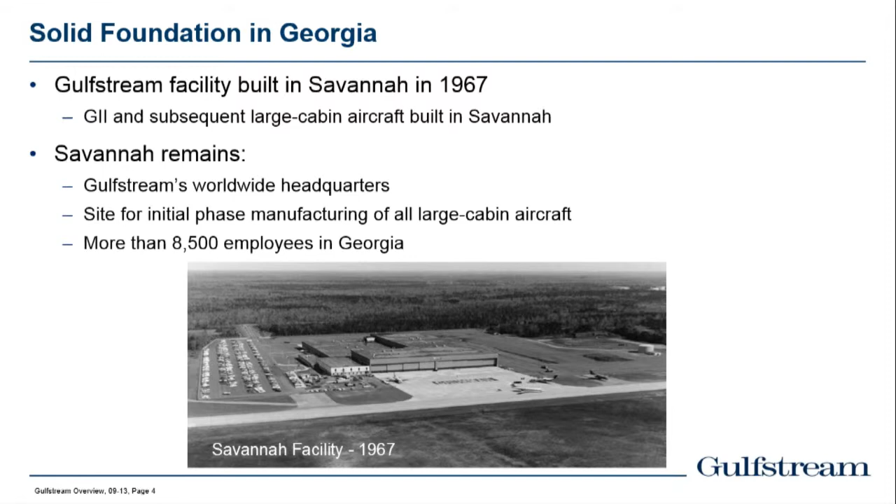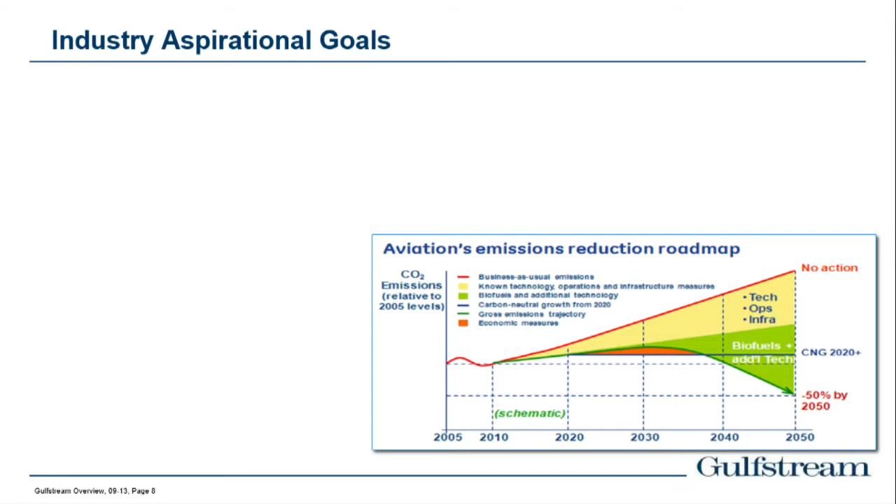The reason is we looked at a couple of statistics. General aviation is about 2% of all the aviation emissions, CO2 emissions, and about 0.04% of all carbon emissions. So it's easy to get caught up in the argument that we're not really much of a polluter, so why even worry about it? Well, a couple things I'd mention. First of all, we still were polluting the environment and are today. And secondly, more and more airplanes are being delivered to the international marketplace, so the installed fleet of general aviation aircraft is increasing dramatically. So we're going to have much more of an impact on the environment.

So what did we do? We set a broad set of emission goals. These goals outline specific targets for the reduction of CO2 emissions primarily. That's to achieve carbon-neutral growth by 2020, achieve fuel efficiencies of 1.5% to 2% annually through 2020, and then by 2050 to be able to reduce CO2 emissions by 50%, with a baseline of 2005.

So we've made a commitment based on 4 pillars, and you can see them also in the graph. One is improved technology, for example avionics, the ability to approach airports without having to circle them. Many of you that fly on commercial airliners know that sometimes you're slowed down, you end up circling an airport. That's because of the efficiency of the air traffic control system, and avionics and the air traffic control system are very important that we address.

Infrastructure and operations is also critical. That's satellite-based navigation, and what you'll hear about is FAA modernization, because that's a very, very fundamental need for us with the FAA to be able to modernize their technology.

And then the use of alternative fuels. Although very promising, I'm going to talk about that in a minute, it's going to require some sustaining funding and a commitment by the industry to make sure that we can do this. Because as you'll note in the graphic, it's about 40% of the goal to be able to reach the 50% reduction goal by 2050. And then market-based measures, and these are usually measures such as working with the EU on trading scheme emission controls and so forth.

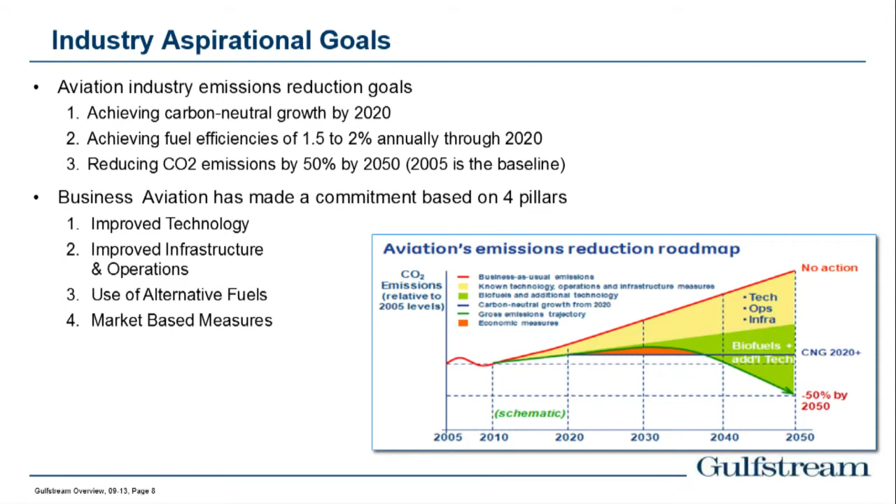So, specific to Gulfstream, there are a number of sustainability efforts that I just wanted to mention. We have a long history of product improvement in noise, emissions, fuel burn, and it's all about having a focus on the environment. So sustainability is being introduced to all aspects of our business, including aircraft design and manufacturing. Our enterprise-wide sustainability goals deal with things like facility improvements, aircraft design and manufacturing, supply chain, the use of renewable fuels, and then an internal focus with our teams in trying to do things every day that help reduce our impact to the environment.

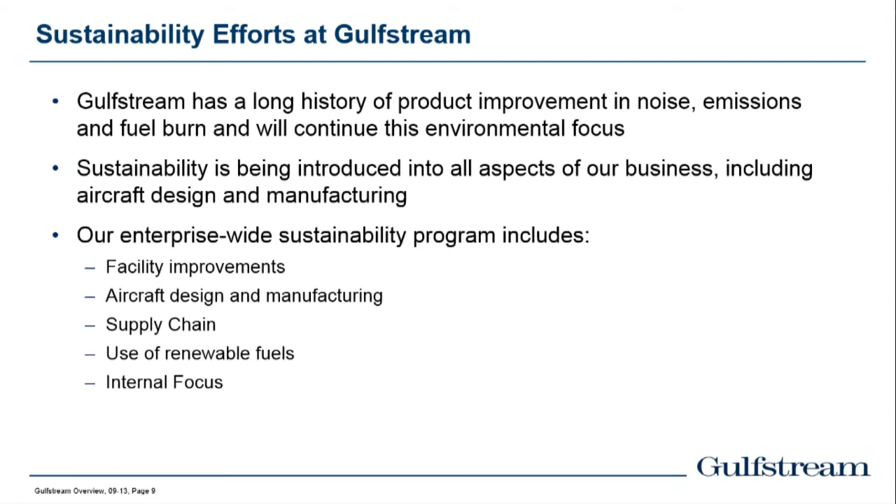Let me start with noise. The federal aviation regulations, what they call FARs, have come up with a standard that's in Part 36, and aircraft with certain type certificates received after 2006 and beyond must meet what are referred to as Stage 4 standards. Stage 3 was set back in 2005 for existing in-production aircraft, and for our purposes, the Stage 4 limit is designated in the horizontal line.

That's the red line you see in this graphic, and our goal is to be well below that, and we are. So by the way, if you look at that red line and you look at the aircraft that are currently in production, now the 4 and the 5 are now replaced by the 450 and the 550, and the 650, of course, is brand new. And you see we're doing pretty good in terms of noise reduction.

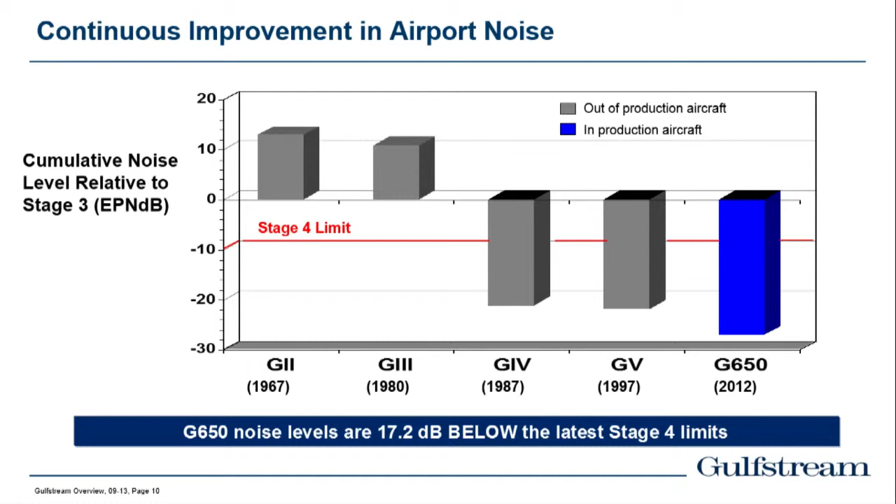Now the other area is emissions, and this gets pretty complicated, but also very challenging for us. The International Civil Aviation Organization, ICAO, was founded back in 1944 with the objective of promoting aviation safety, security, and efficiency, among other things. ICAO's current environmental activities are handled through the Committee on Aviation Environmental Protection, or CAEP, established in 1983.

This group meets annually and sets emissions standards every 3 years. Our industry is now moving to meet the CAEP 6 standards specific to engines put on our airframes. Older aircraft like the G2 are under different standards, but the G450, 550, and 650 have demonstrated a progressive reduction in nitrous oxide levels over the years, as you can see here. Those designations underneath the bars are the engine types on our airplanes.

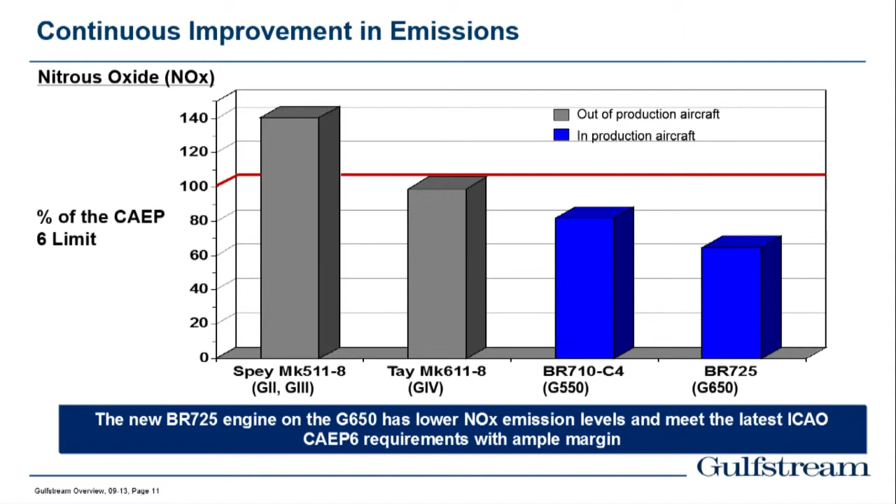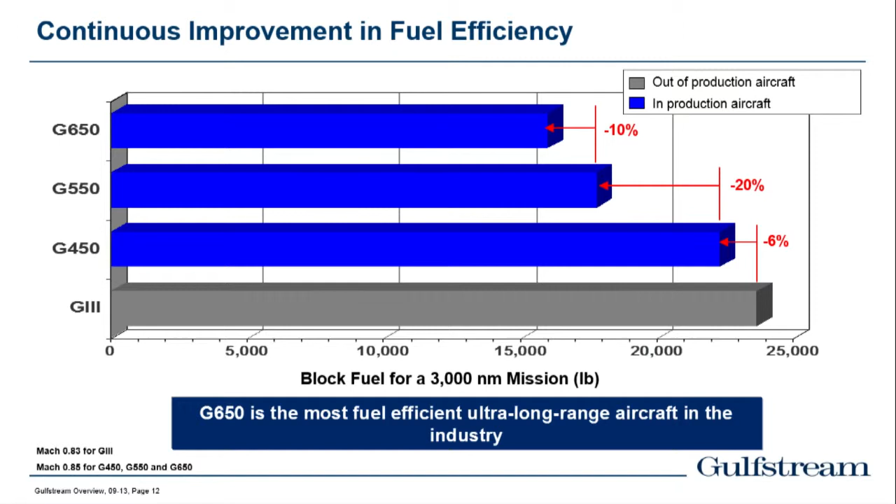Improving fuel efficiency is part of our environmental and technology goal, which helps us meet our CO2 emissions goal of a 50% reduction by 2050. We measure fuel efficiency by block fuel, which is 3,000 nautical mile mission - that's the standard we use. As you can see, there have been steady improvements from one Gulfstream model to the next: the 650 made a 10% improvement over the 550, and the 550 a 20% improvement over the 450. We've done a lot in this area, but we're not done yet.

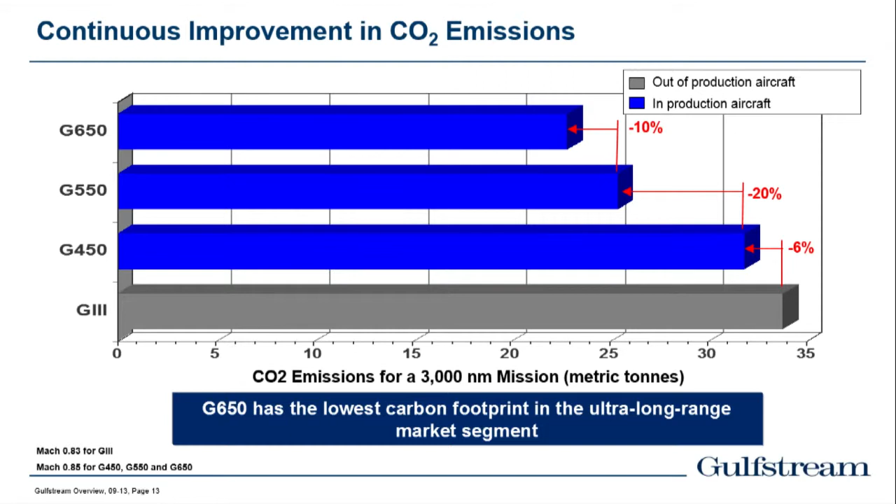Now a little bit about renewable fuels and why we're so interested in this. What are renewable fuels in the first place? Many of you know this, but they involve the recovery of any biological source used for fuels. In other words, once that source is harvested, how do we make sure it's recovered quickly? Some of the fuels we're looking at have to meet that sustainability goal. Quite frankly, these represent a step change in reducing emissions - less sulfur, aromatics, carcinogens, and fine particles especially - and can produce less CO2 over their life cycle.

So renewable fuels do two things that support our goals: they support sustainability, and they support the industry-wide goal of CO2 emissions reductions over time. We also believe renewable fuels will be recognized by the European Union Emissions Trading Scheme. What we want to do is make sure we use these and understand the dynamics and challenges associated with making sure they're sustainable and there's enough to do what we need to do in the industry.

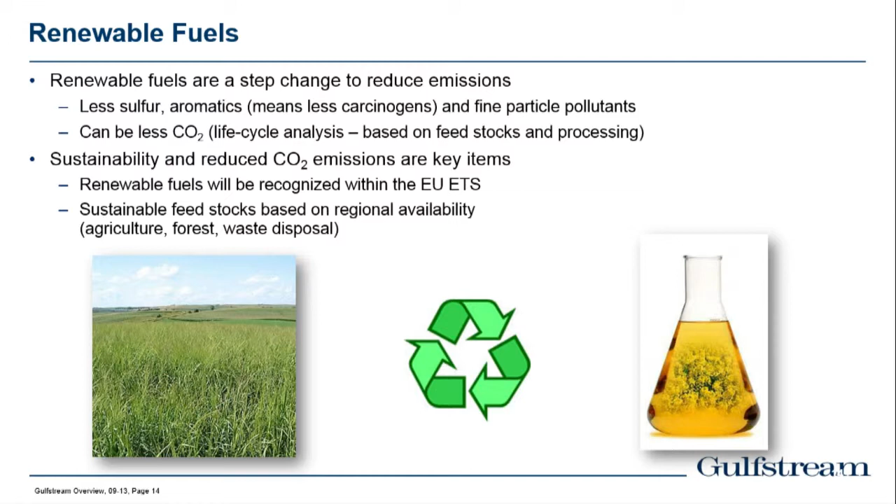As far as renewable fuels for aviation in general, the military has had great interest in this technology and has been using it. We have a good start in this area, but there's a lot to do. We believe establishing ourselves as leaders among business aircraft manufacturers, or OEMs, is very important. For example, the Gulfstream 450 was the first aircraft to make a transatlantic flight on biofuel.

In doing so, it saved 5.5 tons of CO2 using biofuel. We are the first OEM to fly an entire fleet of airplanes to a major air show on biofuel, using a certified fuel based 50-50 blend of camelina biofuel and Jet A.

A little bit about camelina, in case you're not familiar with it - it's a weed that grows and produces a seed. When you crush that seed, it generates an oil, and that's the oil we use in either biodiesel or biofuel. It has such capability and promise that we think it could eventually reduce the CO2 footprint in general aviation by as much as 75% compared to the traditional Jet A fuels we use today.

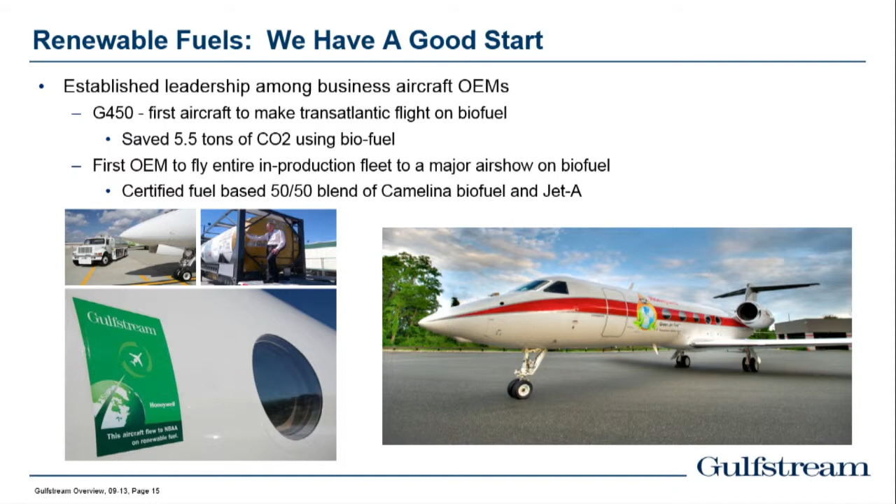Now, I mentioned internal improvements, and some of them have to do with buildings that we build. If you get around the airport, you're going to see buildings cropping up all over the place. Those are LEED certified, which stands for Leadership in Energy and Environmental Design, based on standards set by the U.S. Green Building Council. It deals primarily with the design and operation of the building, from tooling and equipment to how much energy they use.

We also have a recycling program. This is something we started years ago, but we really didn't get it going substantially until we got our employees involved. So 600 tons recycled through single stream programs—if you look at that graphic, you see those blue bins, meaning you can put all your recyclables into one bin instead of going to individual recycling containers. We've diverted 1.2 million pounds of recyclables from the waste stream.

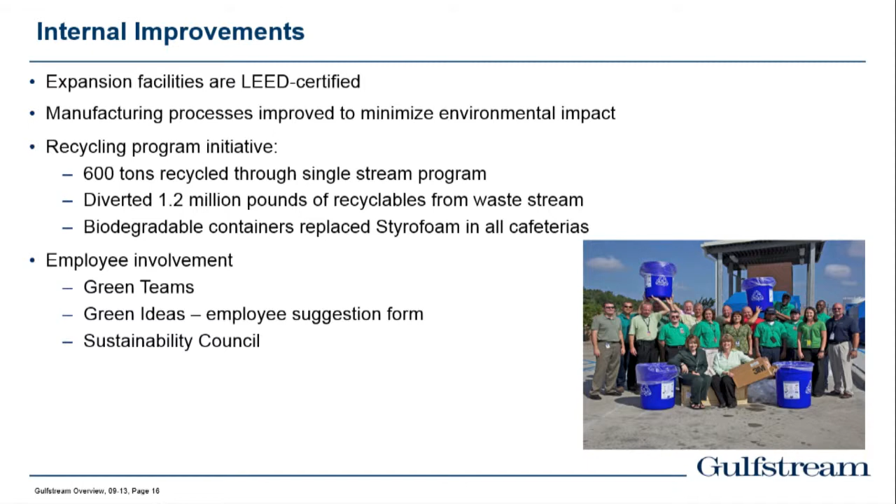Now we're starting to use biodegradable containers in our cafeterias instead of styrofoam. There is so much opportunity out there, and we're learning as we go, but when we see those opportunities, we're making sure that we embrace them. Key to these initiatives is the environment of our employees and their involvement. We have green teams that generate green ideas through our employee suggestion program, and we also have a sustainability council.

As I mentioned in my opening remarks, Gulfstream has supported the Ocean Exchange since its inception. We understand that innovation can best be described as an idea successfully applied, and that's specifically what happens here. You all demonstrate that. I had an opportunity last year to sit through these presented solutions—it is extraordinary, the ideas that come out of this. It's something that gives us a lot of energy and makes sure we can sustain this exchange environment.

Every day, Ocean Exchange captures innovation in its truest sense, because it generates ideas to drive solutions. All of us have a deep craving to solve problems, not only within our own industries, but also in the community itself, the world community. For those of you who are new to this, you're going to see that these solutions that emerge have real world impact. They preserve our oceans while understanding the fine balance they maintain with commerce, allowing us to sustain growth while at the same time protecting the environment.

So in summary, Gulfstream is integrated in sustainability in its company, not only internally but also around the world. We consider it our corporate responsibility to do that. It's good for business, it's good for the environment, and Gulfstream is very proud to be part of this Ocean Exchange and to being a worldwide supporter of the Navigator Award. We can't wait to see who the winner is going to be this year, and we know we're going to have a lot of competition.